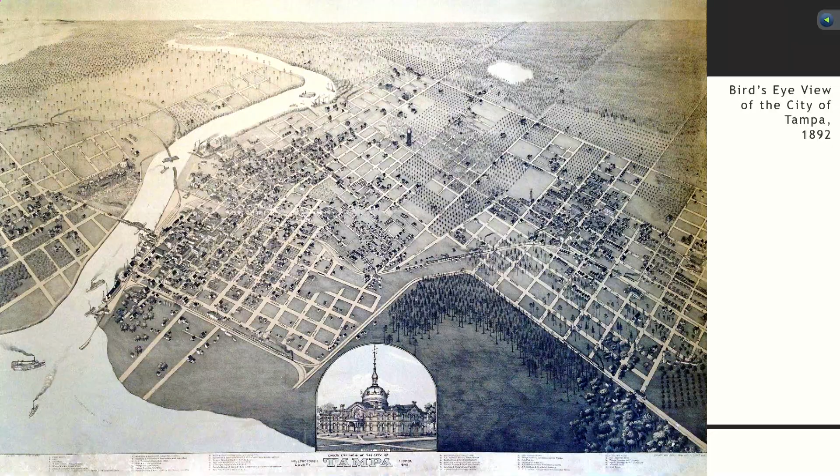Businesses such as restaurants and retail establishments, with offices and rooms for rent above, and the home of one of the early mutual aid societies, the Orden Caballero de la Luz. Unfortunately, many of these early wood buildings succumbed to fire, but that made way for the Ybor City we still know today. The early wood structures were quickly replaced, and soon the area along the commercial core was full of one and two story brick buildings.

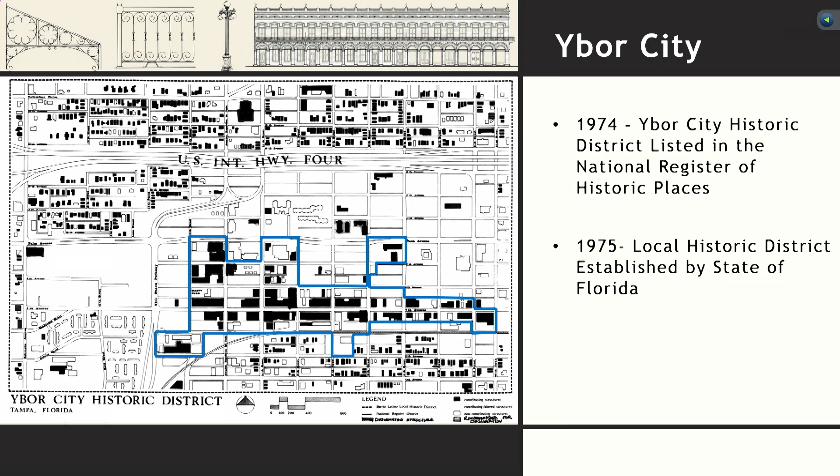And the city of Tampa definitely did that the same year. It was, I believe, a bit later in 1986 that the initial set of design guidelines that the Barrio Latino Commission still uses today came into effect.

In the 1980s, there was a movement to recognize many of the immigrant contributions to the development of the United States, and one of these efforts came to pass as the establishment of the Ybor City National Historic Landmark District in 1990.

This larger historic landmark district reflected the residential components of Ybor City and its various immigrant populations. Locally, from 1998 through 2013, there were multiple boundary expansions of the local historic district, taking it further to the east, further south down to Adamo Drive, and north to 21st Street, to be more in line with the area that the National Historic Landmark District included.

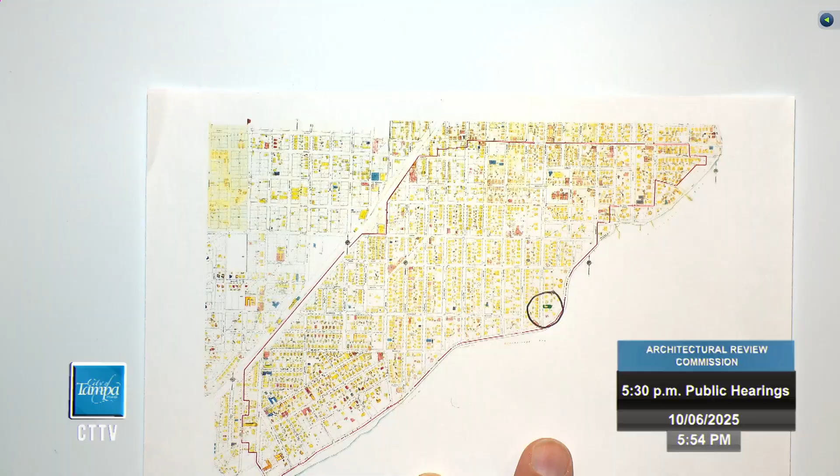The accessory structure as reflected on the agenda has been continued. I'd like to go through the photos at this time, starting with the 1929 Sanborn map. The property in question is highlighted and circled. That does face South Boulevard, which runs north and south.

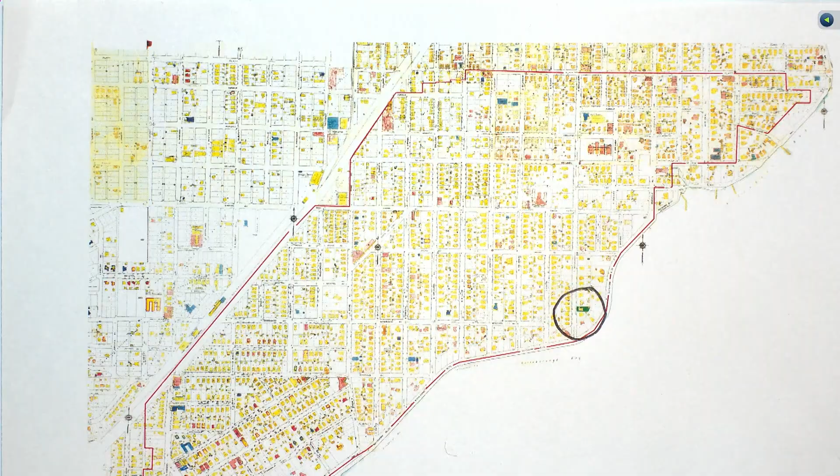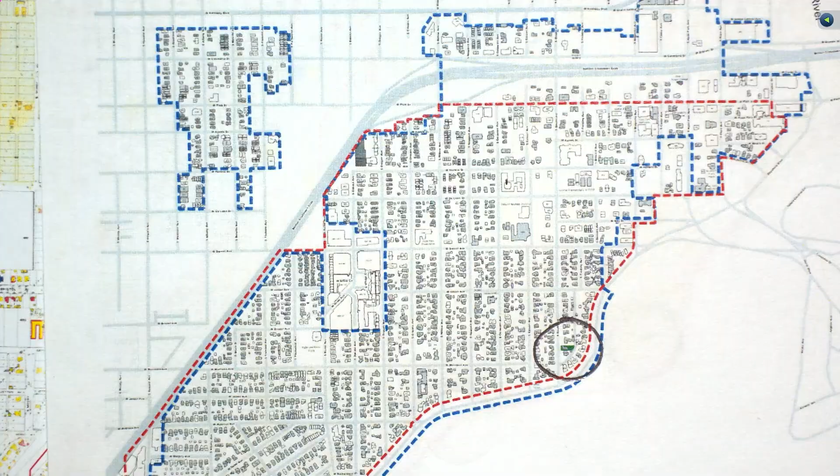To the north, the cross street is Inman, and you see Bayshore Boulevard to the south. This is our vicinity map. If you zoom on the vicinity map, you see the primary structure that is shaded, which is contributing. The accessory structure is not even shown, and it's non-contributing. This is the current day aerial. Once again, Inman is the cross street to the north. The house faces South Boulevard, and you see Bayshore Boulevard.

This is within FEMA's boundaries. Since the primary structure is contributing, they have some flexibility to add on to that building. There are some rules that go into effect, but the request in front of you this evening is not affected, and it can move forward. The accessory structure is within the LiMWA FEMA boundaries. It's non-contributing, so there are some stipulations as to whether they could add on to it or not. We were not aware of that when they first made application, and going through the process, we were in discussions with the building department, which is why that portion of this request has been tabled, so we can get further documentation on how to move forward.

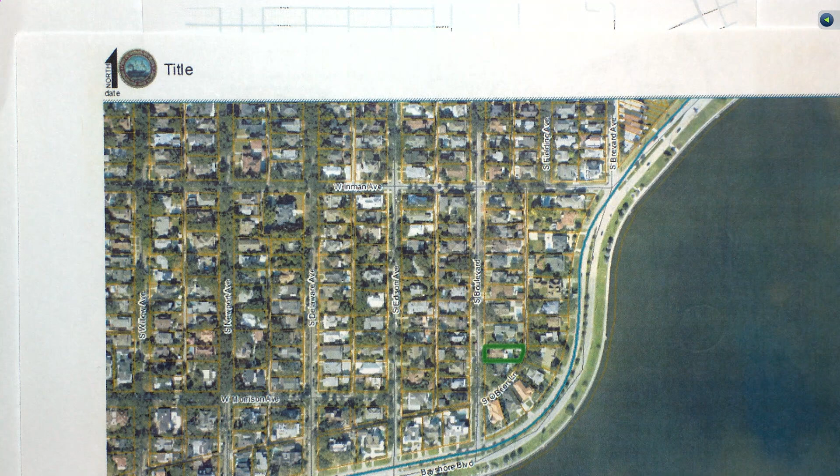This is the primary elevation, which faces South Boulevard. This is 840. You can see a little bit of the primary elevation, and then the south elevation. To the south, you have a contributing structure. Moving back to the primary structure, I apologize for the pictures, it was in the morning and in shadow. Looking down the porte-cochere, a traditional porte-cochere with the details and materials.

Continuing past the gate on the porte-cochere where the drive aisle is, and moving towards the accessory structure. I just wanted to show this: it is a CMU building. It was built after the period of significance, and that's why it's non-contributing. Looking back from the accessory structure towards the primary street, South Boulevard. To conclude with a couple photos, the historic part of the house is here. You see the addition — when they did the accessory structure, they probably did this addition as well. It's CMU with a flat roof. And just another shot of that addition that was done some time ago.

That concludes the photo presentation. At this time, the agent will address the board.

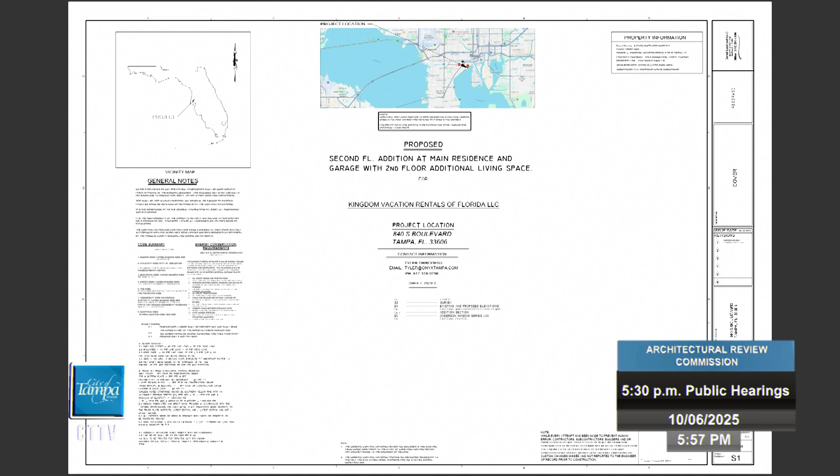All right, guys. Tyler Thibodeau, Onyx Construction. I was hired by the owners, Kingdom Vacation Rentals, for the addition here at 840 South Boulevard.

Rolling through. I know we can't see it on our screen now. It was turned off again. Tyler, did you bring a paper backup? I did, let me grab that. One second, sorry guys. Since they're having some problems with the video, all applicants are told to bring a paper backup, so we're gonna head that way.

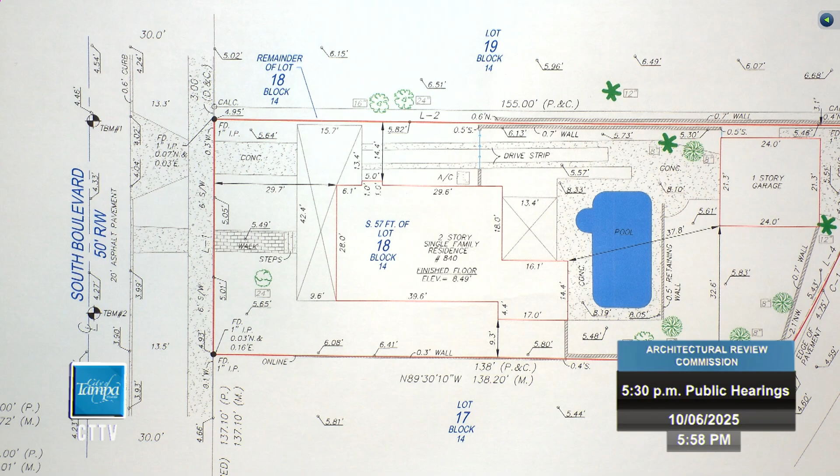So this is a survey here. Existing South Boulevard is this street over here.

This is our structure. Our addition is going to take place over this existing one on the rear. Let me see if I got a pen to point with. Appreciate it, thank you.

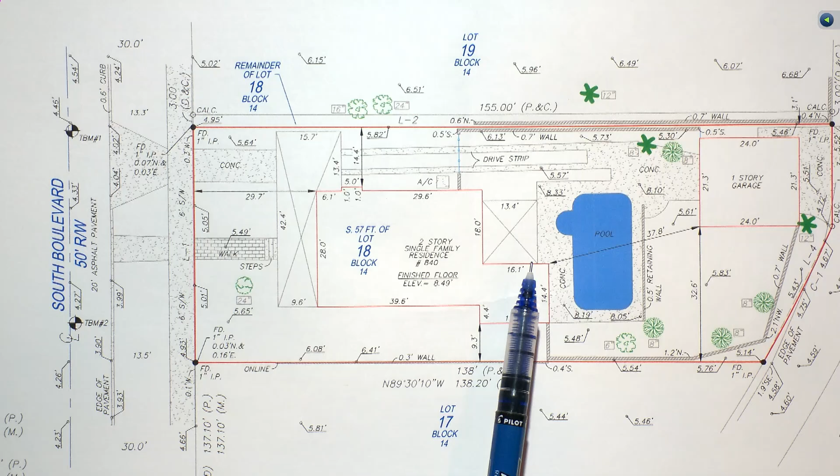Our addition is going to take place over this existing portion on the rear. Everything else back here is going to remain the same. One-story garage, AC unit's going to stay in the same place. Driveway, everything's going to remain untouched through here. Tree is going to stay in the same location.

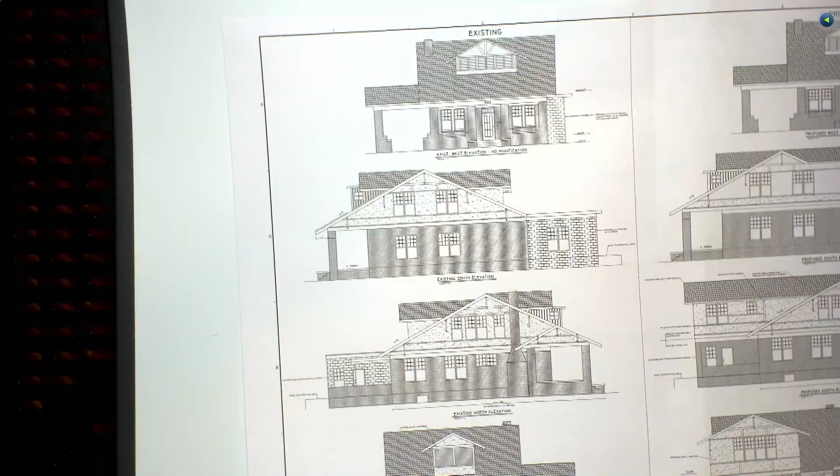You guys like to see wall section next or elevations? You can do site plan, elevations, architectural details, wall section. Plans, elevations, okay, site plan was there. Here we have the existing. And then can you zoom out so we can see them both at the same time? Absolutely, thank you.

This side over here is existing. It shows the CMU portion. Back here, really, nothing changes till we get over here to the proposed portion. You can see the addition peeking out in similar retrospect to the addition over here. That was done some time ago.

From the side elevation, we have this line here as the delineation line between the historic aspect of it and the additions back here. Once again, this one's already existing. This second story addition is the proposed one. And we'll have to tie in through this roof line coming back through here.

On the north elevation, kind of the same thing, mirrored. We are encompassing this dormer on the back with this addition and matching it up with overhangs, similar to what's already there, matching all that. And this is actually coming out over the existing addition down here. We're going to brick clad this column, brick clad the existing addition to blend in a little bit better than what it is now, and stucco everything up top to match.

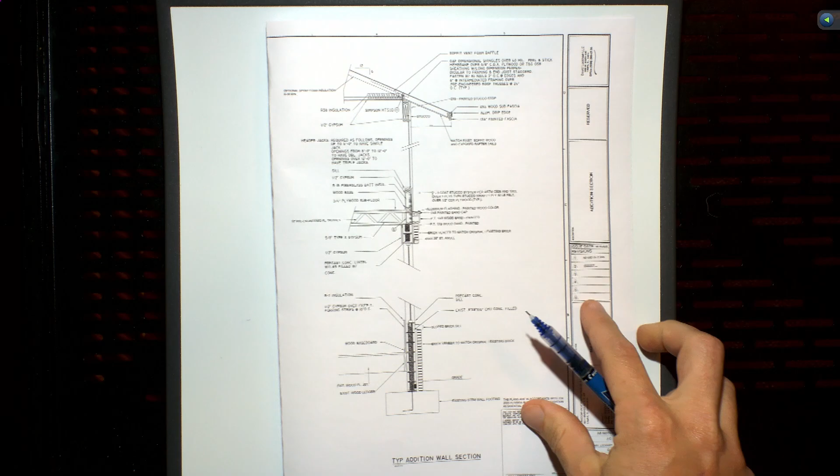Wall section here. This bottom portion is already done for us. It's all existing. The only thing we're going to do to it is add the brick veneer on the front to help it blend in with current guidelines.

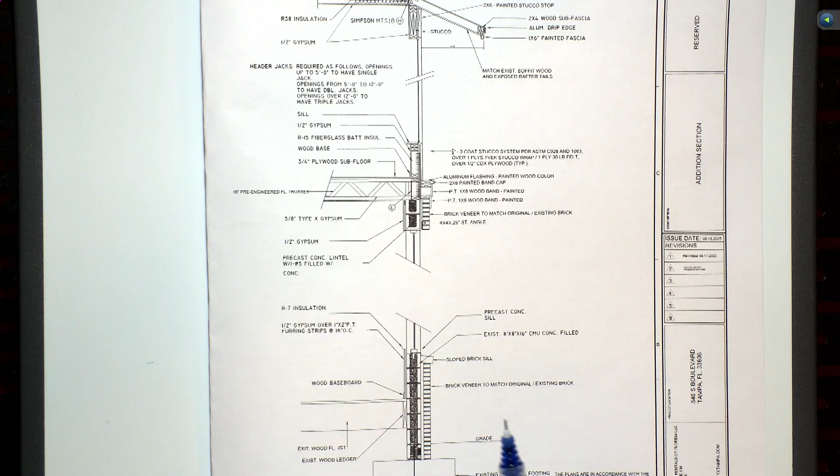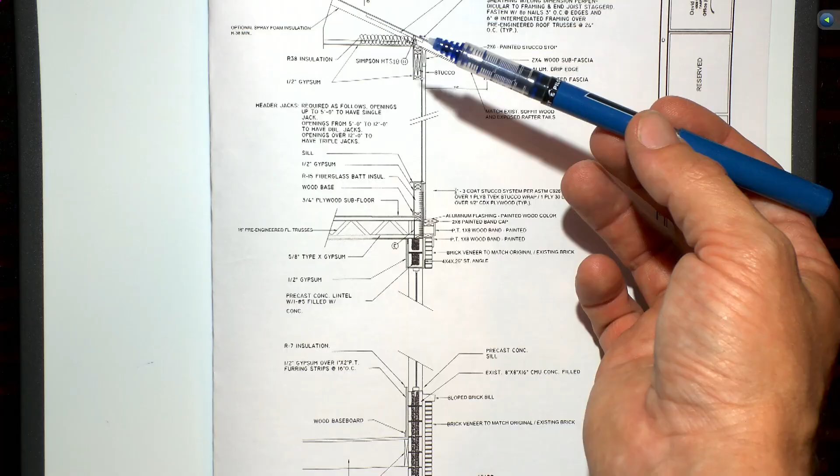New construction is starting up top here with the pre-engineered truss. We have some 2x and 1x kind of strategically placed in here to act as stucco expansion, similar to what was done on the existing house. The soffits are going to match what's already there. It's beadboard on the underside. They are a quite large soffit, I want to say they're 3.5 feet, 42 inches, somewhere in there. And we're going to match the exposed rafter tails, what's already there as well.

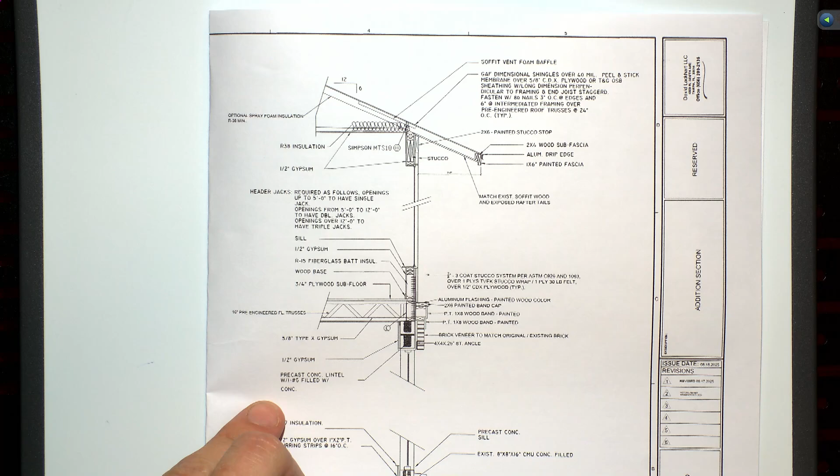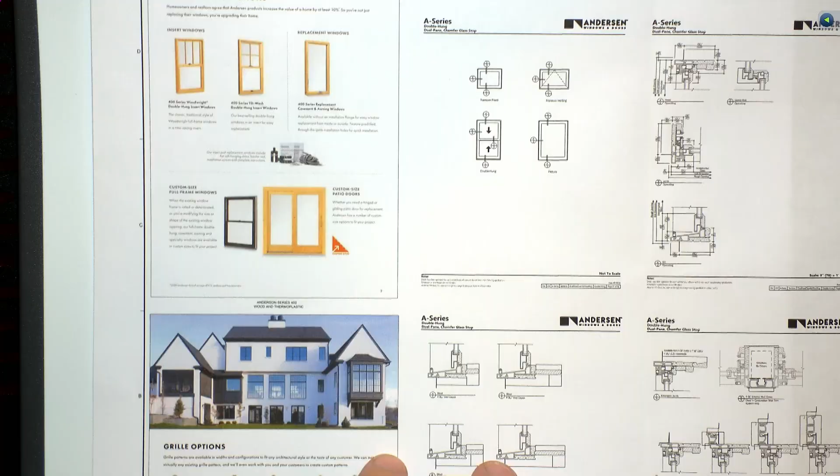With the details here, the existing windows are all going to remain. On the newer addition here, we're going to go with an Andersen full wood window. They do come in a 9 light as to what's currently existing on the house down there. We can get the bottom as just glass and the top as a 9 light to match what's already there. These are all the specs for these windows.

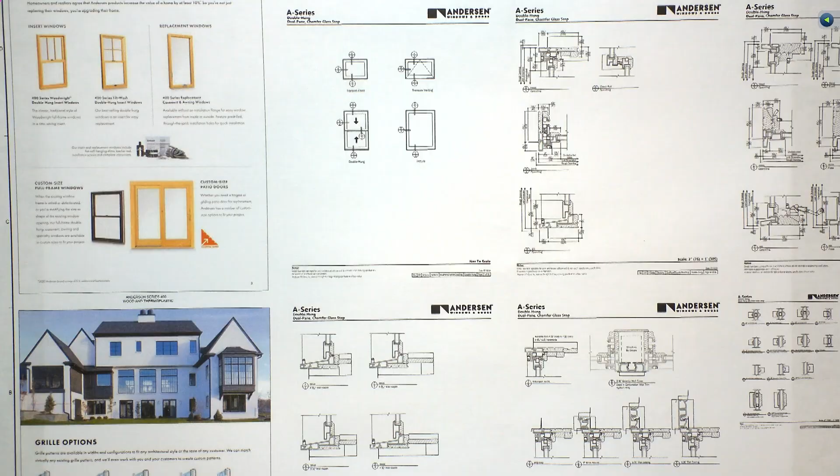Can you zoom out? I'm trying to figure out where that is that you're just pointing to. Yeah. North, okay.

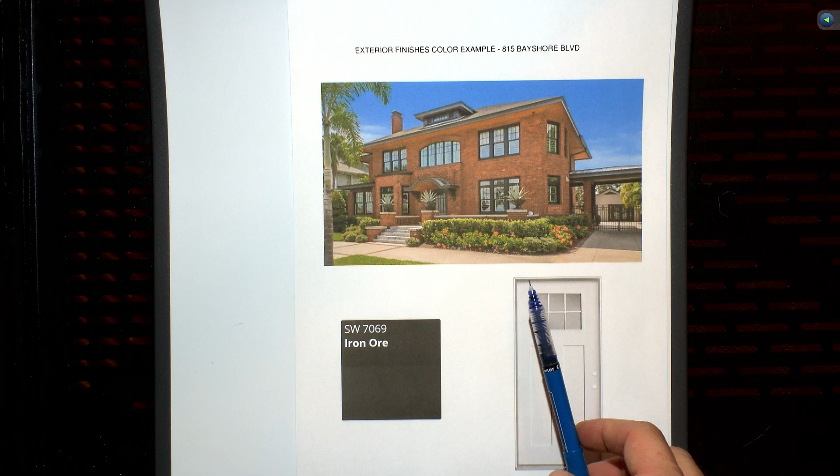The front door currently has a transom, a 3-light transom above the door, and we're going to leave that transom and just replace the door. The transom and the door together will give it the effect to match the 9-light windows that are there.

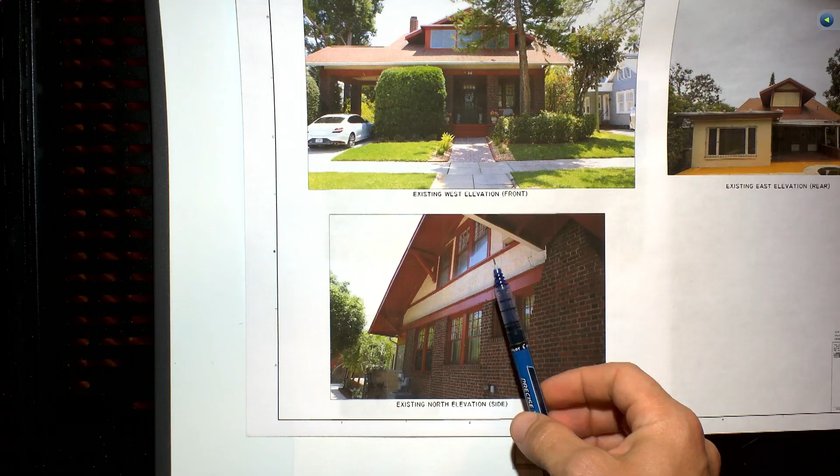You can see the transom up here in this picture, hopefully, and that's going to remain.

And that's all I have. Any questions? Open it up to you guys. Thank you. Absolutely.

Good evening, Commissioners. Ron Vila, I'm a planner with Historic Preservation. Staff's finding that this application is consistent with the Hyde Park Design Guidelines.

We reviewed the plans that were uploaded September 16, 2025. We feel that this application is consistent for the following reasons. On page 3 of the staff report, we have the bullets from the Hyde Park Design Guidelines, and for scale and massing, this addition is in the rear and it meets those conditions.

The podium that's here that he's adding onto, there's a little setback issue. If you look at the site plan, that also delineates the primary structure from the addition as well.

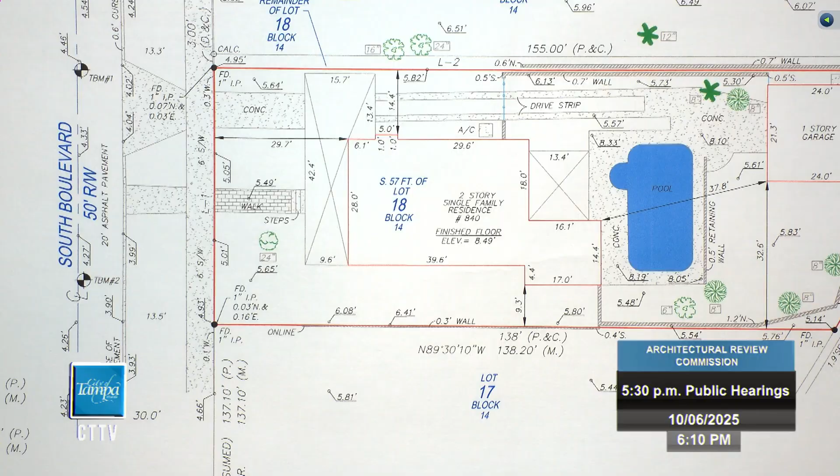Okay. The brick cladding on your wall detail, one of your wall details showed that you were using a thick brick over the CMU with a ledge. Do you have that detail? Yep.

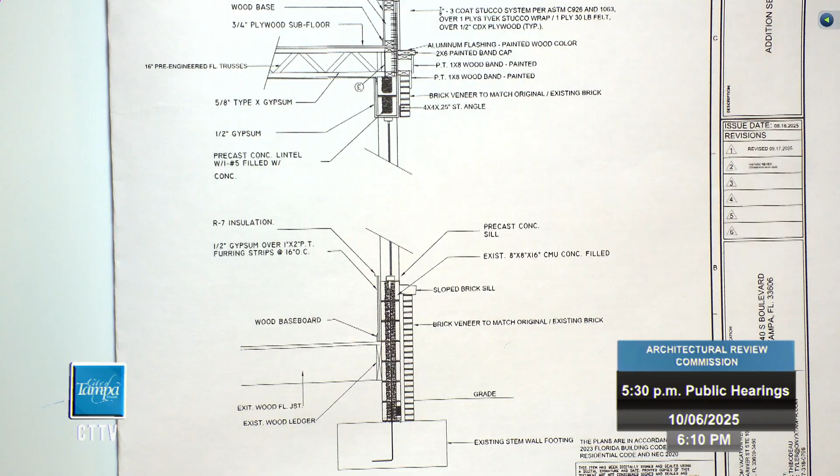So how does that detail work with using your thin brick? They offer that product in both thick brick and thin brick, so you would use a thick brick over the CMU, yep, we can use a thick brick. Okay, can you pull that detail down a little bit so I can see the soffit that you have?

Okay. That's all my questions. Thank you.

Okay, and having seen this, could you just pull up the elevations again one more time? Absolutely.

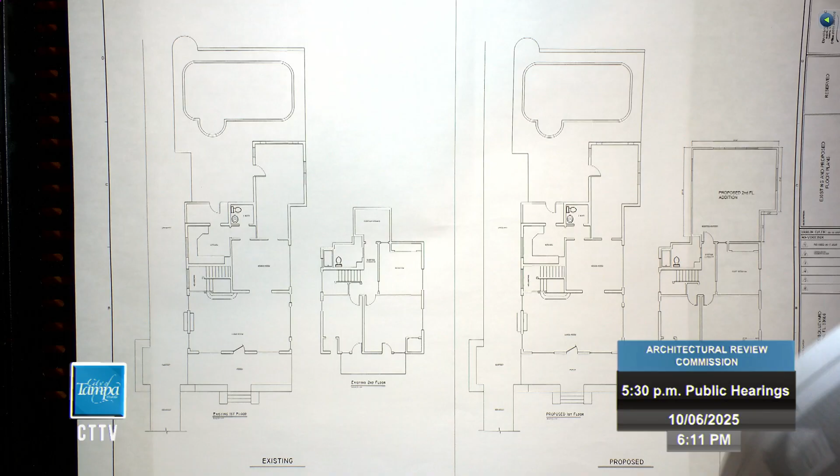Okay, thank you. Could you leave those elevations up?

I need some clarification here because I'm losing this whole gable. The second elevation from the top, on the left side, I'm seeing this roof gable, the side gable facing us. It's a very prominent side gable, very definitive, with symmetrical windows. Then I look at the addition on the right, and that gable's gone. It just disappears, and I'm wondering about the addition.

The addition isn't just over the existing addition, correct? Is there any way you can design the exterior walls of that second story part of the addition you're adding onto over top of the main contributing structure and still leave that gable roof definition edge that you can see in the left elevation? Is there any way to maintain that gable edge elevation when you put your addition on it?

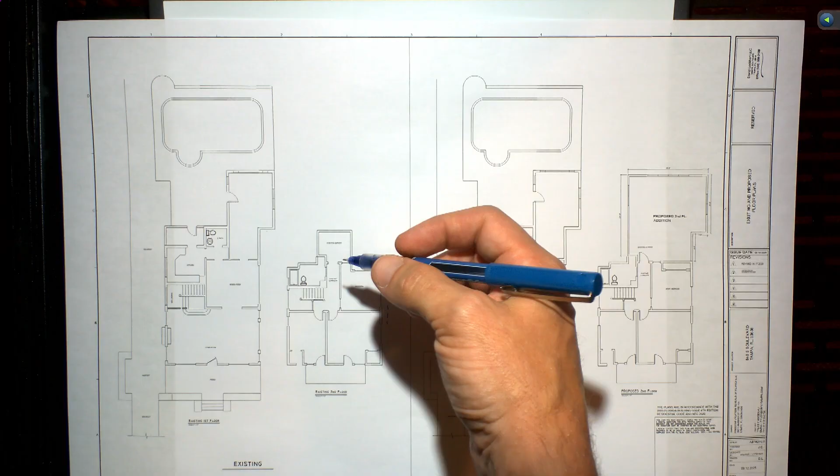This is a roof line, inset back here on the bottom down here. This will become a vertical wall. This wall will carry up, and that overhang essentially from here to here will go away with the wall.

So you're demolishing a substantial amount of the original house to put this addition on. Is that what you're saying? This structure is built into the roof, so we're just kind of building in and tying in. But you can't have that roof line in a room. That entire roof is being demolished. The roof framing that makes up that gable is being demolished, because you can't put a room up there with the roof framing passing right through it on an angle. Am I missing something?

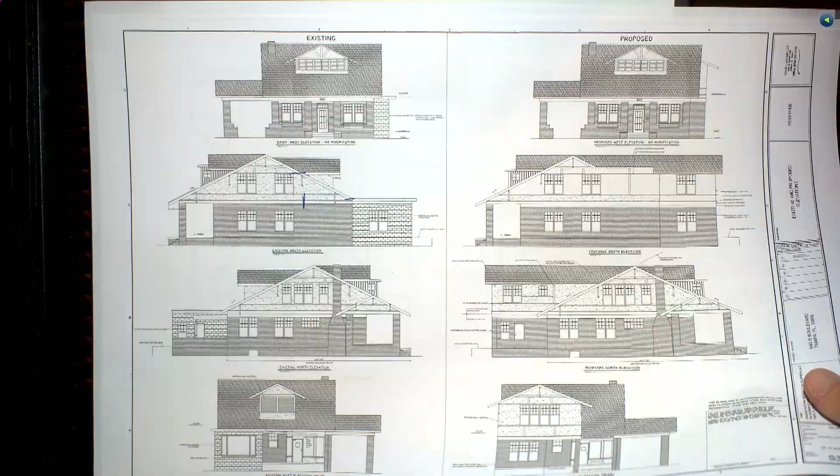There's currently a room up there, but it's lower ceilings, and there's a closet space back here. Right, which is staying in the new plan.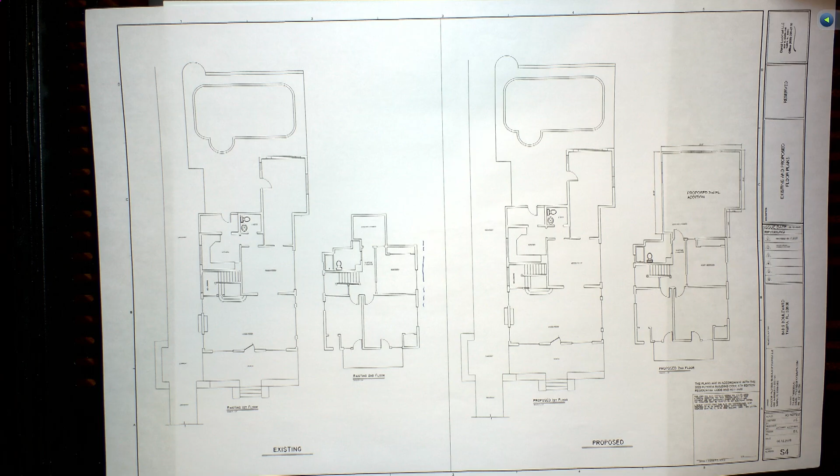What I think needs to happen is... well, I don't know what needs to happen. I just think it's a considerable loss to have that gable go away and put an addition, and there's no dividing line between the existing and the new. There's no clear line, and that's one of the things the standards really require, is a differentiation between the existing house and the new house. Would you look into a way to define that?

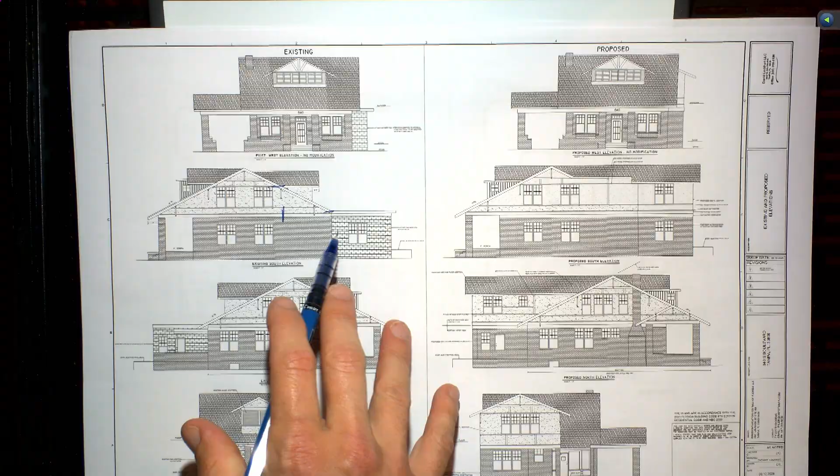You mentioned thin brick and full-size brick. Which one are you using, and where are you using them? Are we able to use both of them? Will you guys take face brick on an addition? Yeah. Okay, we were probably going to use the thin brick in lieu of the face brick on these areas as shown on the drawings. But that's not what your wall section shows. We will have to update the wall section. Okay.

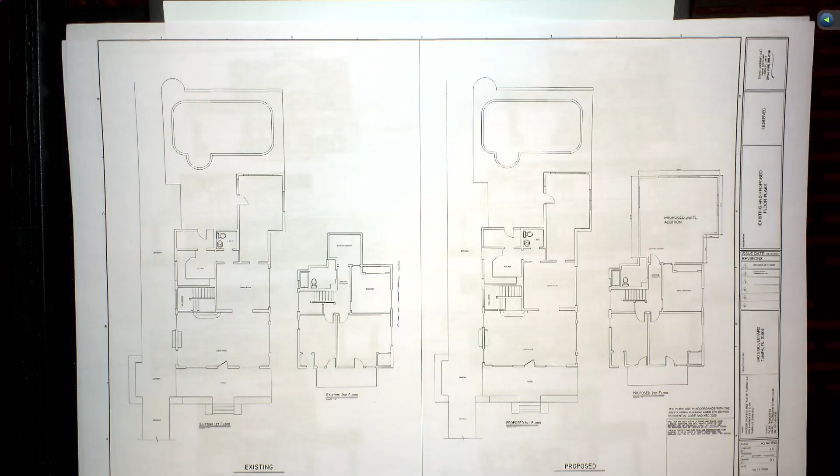You're replacing the entire roof on the entire house, correct? Yes. What's there now? An older brown dimensional shingle. I think it was 9 years old.

Okay, we're not getting into colors here, but then the front door, is there a reason you're replacing this front door with the transom over it? Can you zoom into that photograph of the front door? I don't think we have a good picture of it. But you are replacing that door, right? That's what you were suggesting? Yes, it is damaged and needs to be replaced. Is it original to the house? I do believe so.

Would you consider having it repaired? Because I really can't tell from the photograph, but it looks rather elaborate. Is there a way to not replace the door and have it repaired instead? We can certainly explore those options. Would you be willing to look into that?

Yes. Okay, and then to the stucco patterns. Can we talk about the stucco patterns on the addition? Absolutely. Can you show us, there's the existing stucco. Can you zoom into that, so that we can see what we're starting with.

What is this stucco pattern here? I think it's a skip trowel finish. Okay, and you understand when we're trying to get into this differentiation, we don't want the addition to be copying the main house, correct? Yep. Because then nobody knows where the line is between the new addition and the original historic structure, which is in this case well over 100 years old, correct?

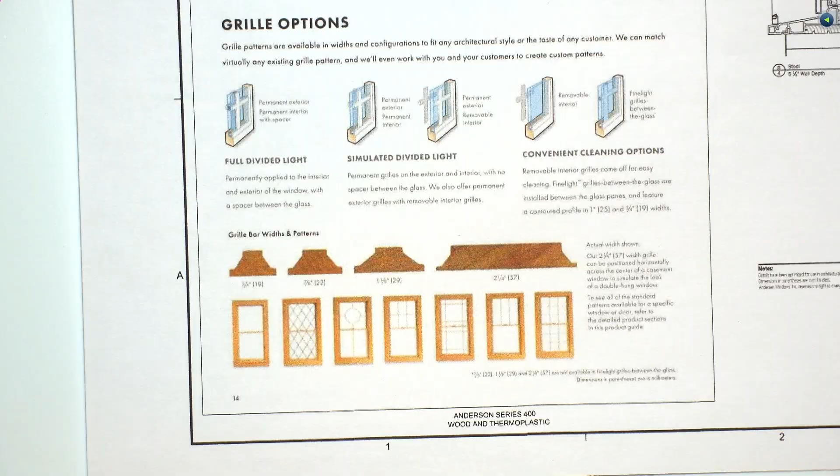Okay, I just think the addition's windows, again, so people realize where the addition is and where the old house was, that's all. All right, I think I've beat the horse enough.

So essentially, those were my questions about the roof line. So how many square feet are the second floor? 580 plus or minus. And that's it? Yep, and it's mainly to build out that back room? Yep, to make it a bedroom. Yeah, that's going to be the proposed master.

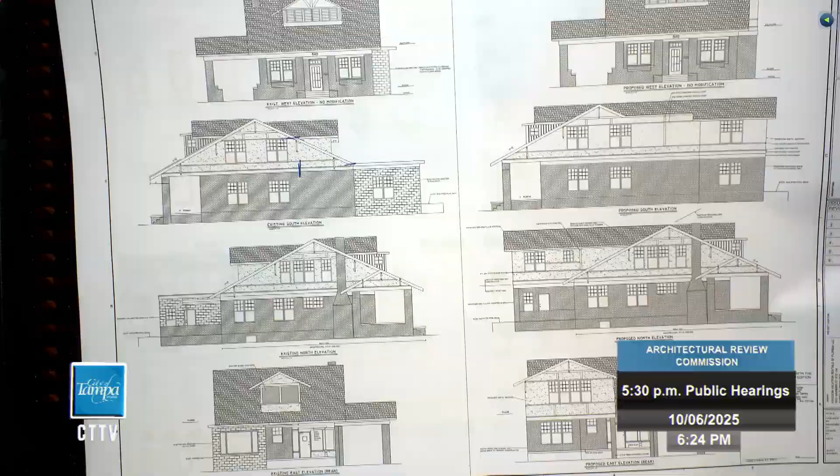Okay, can you go back to your elevations and talk about that column in the back? Can you describe it, or zoom in there? Here we are, where is it? And then it looks like the door is hidden behind something. Is there a knee wall being added, or is that existing? No, go to the one right above it, the elevation. So the columns are to the left of your finger, and then that door, it looks like half a door, so what's in front of it? Yeah, so there actually is a wall, right, can you slide it over a little bit? Let me zoom out a little bit. So that's an existing wall. It is, yeah.

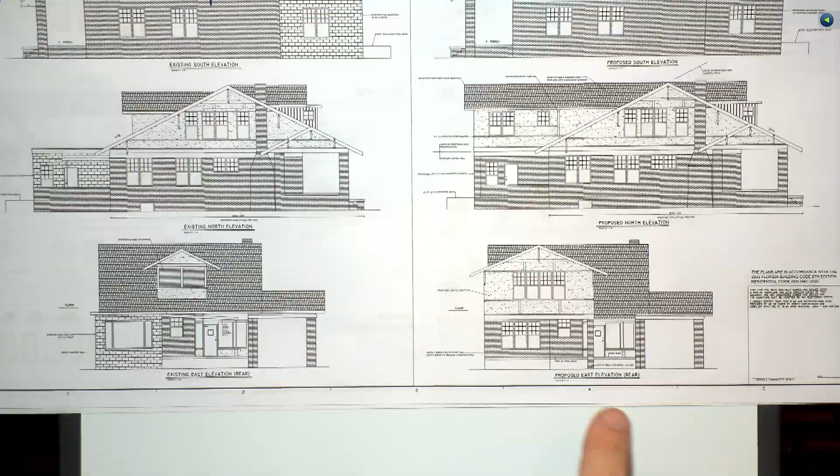So then how are you trimming out that column? It's all brick? Yeah, the column, the architect chose to just match the brick that was going on there, and it played in with the columns throughout the rest of the house. Okay, and that's an existing column? This column here is new, all the other ones are existing. That will be out there to carry the load of the addition.

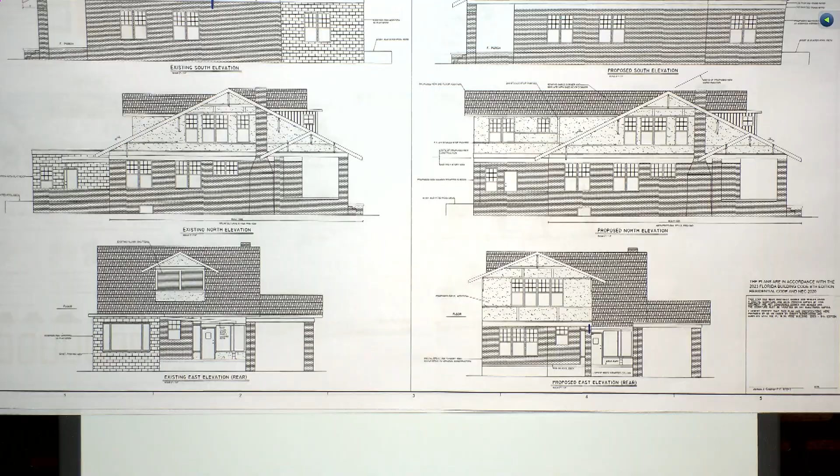All right, now can you put the photos that show the rear of the house up? Because I know there's an elevation change there with that pool deck. I wouldn't have thought it. And here's the wall over here. So then why is that column, all right, so that's a flat surface. Your addition is essentially flat against the pool. Now put your elevation back up.

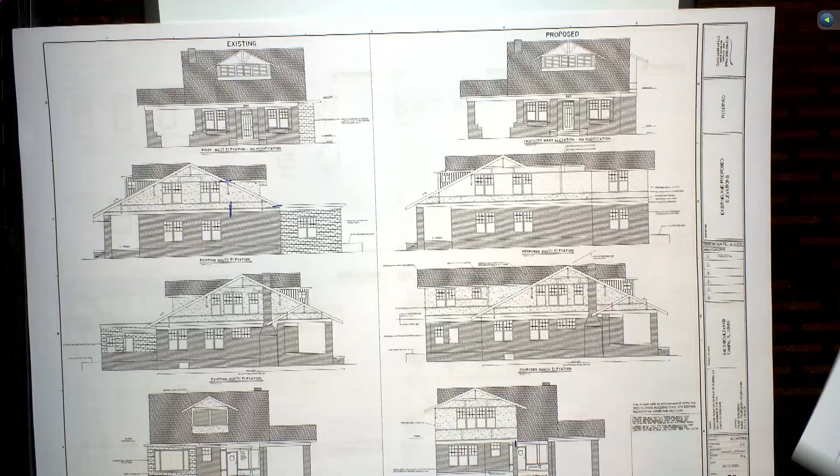So now slide so we can see the bottom. It looks like the brick is extending down below whatever that white base is. We're gonna have to get down to solid ground there. That pool's built up about, I want to say 3 feet in the back. Let me see if there's topo information on the site plan. Yeah, but you wouldn't see that. Where is the pool elevation on that? On that last rendering on the bottom, where is the pool elevation? The pool's gonna stop here, you won't see everything below grade. Okay, that's all below grade, that's just concrete down there. That's below grade, okay, gotcha.

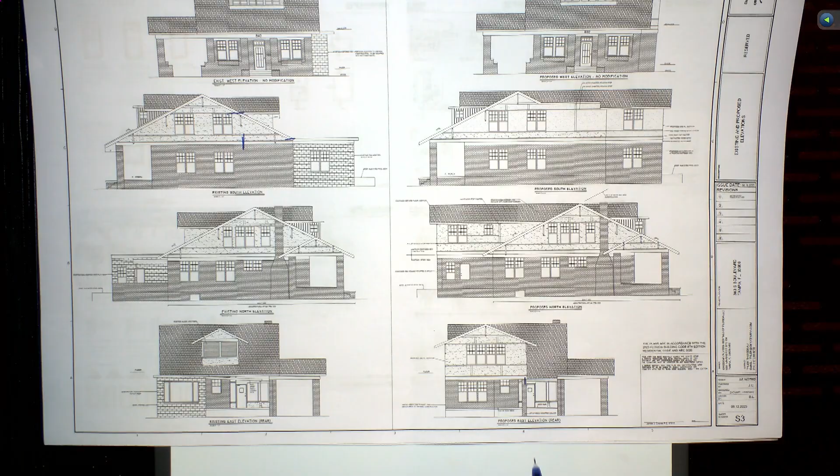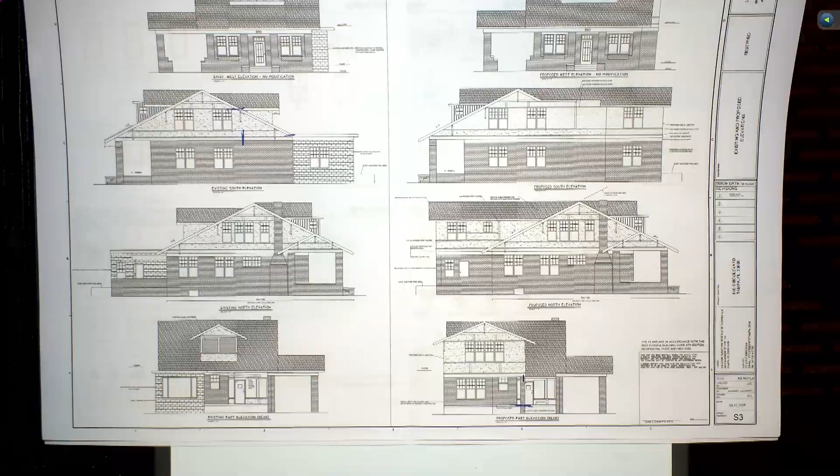Got it, okay, we talked about that. Are you adding any lighting fixtures? Exterior fixtures? No, the owner wants to, well, let's think about this on the rear. No, they're gonna rebuild everything that's there. We talked about it on site. They have some pretty big fixtures on the front porch, and they want us to try and send those out and have them refinished, put new glass in them.

Okay, also if you'll put the elevations up looking at the front, those existing windows on the second floor facing the street, are those storm shutters? Put the photograph up if you don't mind. Are those plexiglass storm shutters on there, or are you replacing those windows, or what's going on there? Second floor windows, yeah. This is an interesting feature to this house.

I think we're still not looking to change it, and we're not looking to, can you zoom into it, yep absolutely. This is, I'm not exactly sure what it is, if it's an old porch that was enclosed at some period of time. We tried to look back and find out what actually happened to it. But do you know, is it aluminum? I'm not too sure what the windows are. When we were looking into it, we were looking into more of, if we were to open this up and probably bring it back to maybe how it used to be, how do we make sure everything below it is watertight? Because this hangs out above the front porch. Right, and I think everybody, the architect and engineers, and the owners kind of decided, well let's not really do anything with it. Let's just try and restore what's there, with some paint, clean it up, keep it.

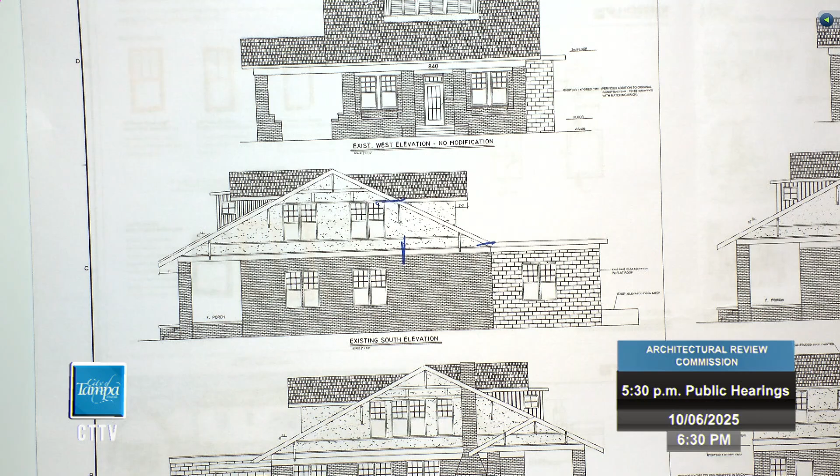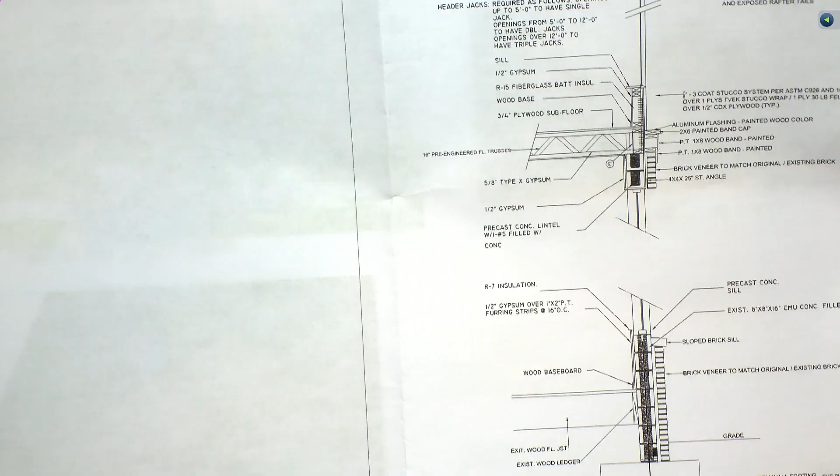Understood. Last question is about the foundation. Are there any openings? How are you dealing with it? Is there any change, or is it just that same brick pattern going all the way down to the ground? It is the same brick pattern that does go all the way down to the ground. There are some vents in there, shown in a couple little areas. There's a screen over this for access, but along this side there's just a very few amount of vents. The existing footing under there - we did some exploring in the last couple days and didn't get that information into this set of plans - but the existing footing under that addition is sized properly to support what's above, so we don't need to do any work there.

Okay, and then last, if you do have to upsize your AC, are you gonna have to elevate it because of the FEMA flood? We can certainly look into that, I don't have that answer right now. Well, my question is if it does have to be elevated, are we gonna see it from the driveway, from the road? Is it gonna have to be screened? That's what I'm checking out right now.

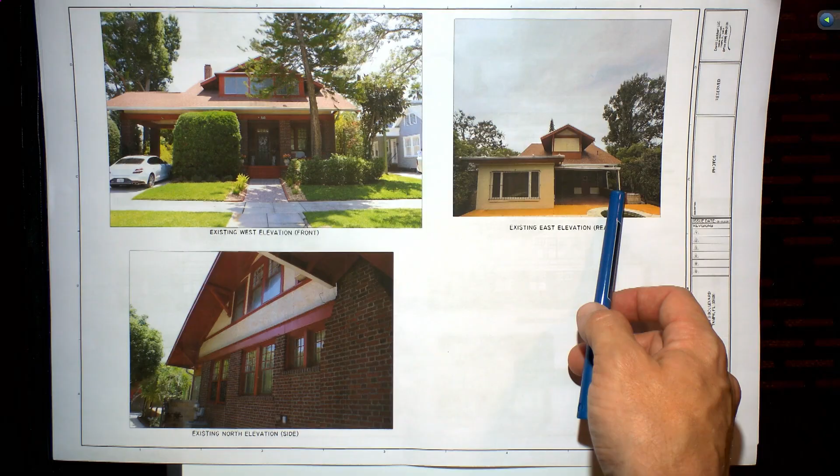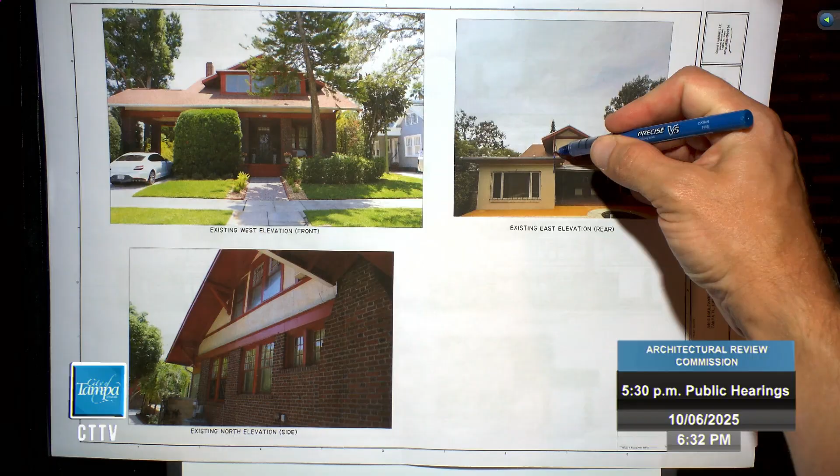Was there discussion with the architect about keeping the gable, the roof line, and doing an addition somehow? There was a lot of discussion into how this dormer plays into the addition. Originally, the addition kind of stopped at this edge here, and this created somewhat of a shed roof over this dormer that was here, and then they decided it'd just be good to overtake the whole dormer, and how that plays in, I think they just kind of worked through it on their drawings.

So is it too narrow to keep the gable? Does that upstairs room become too narrow and not enough square footage? I mean, why are we taking out the gable, that's really my gable question - why are we doing that? Because to me, when you're coming down the street, that's what you see is that gable, and now it's gonna stop and there's gonna be this - what appears to be, I'm just telling you from my perspective - a straight roof that I have a hard time saying is in line with the historic nature of the home. So I understand they want to add 500 to 600 square feet, so I'm trying to figure out, was there some other way of doing that they looked at and said it can't be done because of that, or was that not really looked at? If you know - you may not know.

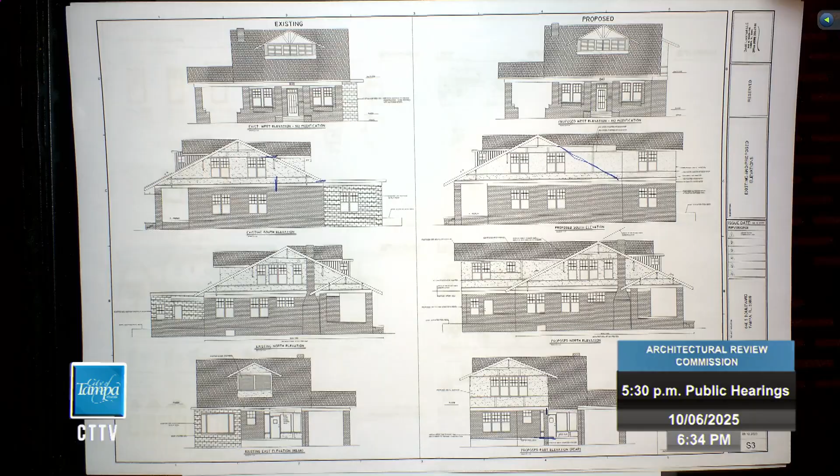I know that the overhang, the size of the overhangs were a concern. If you continue this wall straight up, I'm not sure how that plays into it, but they decided it went away from this point to this point. If you would carry that on, maybe they could take that wall and set it back and try to give it some more meat on it. It just seems to me that on that side of the house, you're taking away the whole character of it and of that roof line. So in any event, we'll discuss that, but I just was wondering if they had really looked at that or not. But it sounds like some they had, some they hadn't.

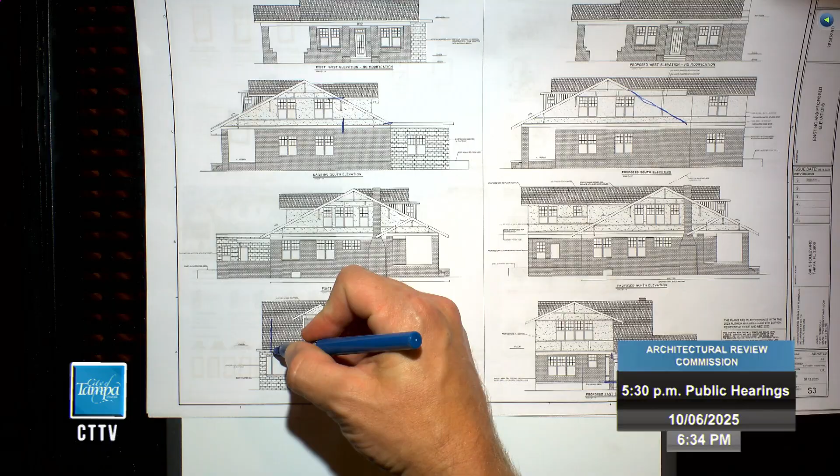No, thank you, we're okay.